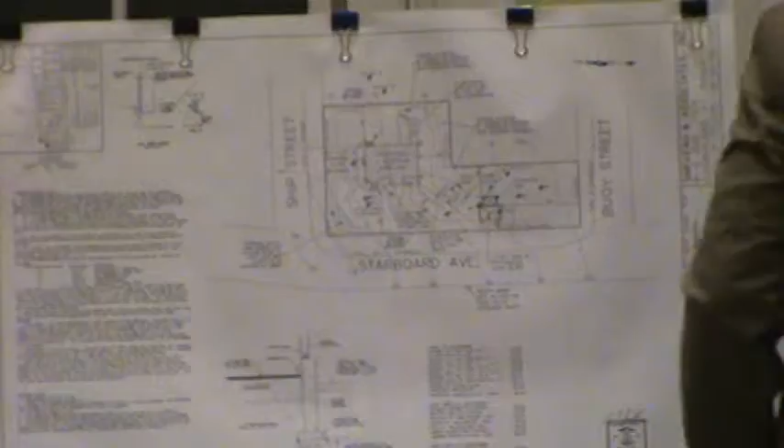We'd like to qualify Mr. Barveau as an expert witness. Now, Mr. Barveau has been here on a number of occasions recently, so we are going to dispense with the qualifications that everybody's agreed. Yes, Michael made a motion to qualify Mr. Barveau. Is there a second? Second. Nancy, second. All in favor? Thank you, Mr. Barveau. Thank you.

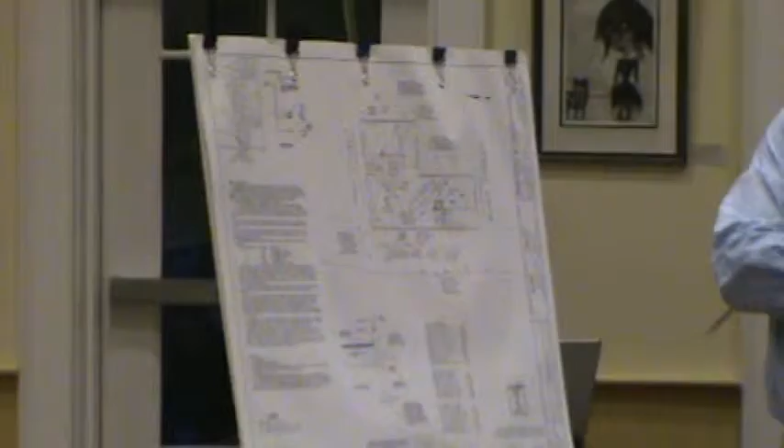All right, Mr. Barveau, can you just describe the current existing conditions on the lot briefly? It's a vacant wooded lot. And what about the grade of it? Well, the property fronts on 3 streets: Ship Street, Starboard, and Buoy. The grade drops from Buoy Street, at an assumed elevation of 100, to an elevation of 90 on Ship Street, which is about a 10-foot drop over about 240 feet of distance. So 5% or so.

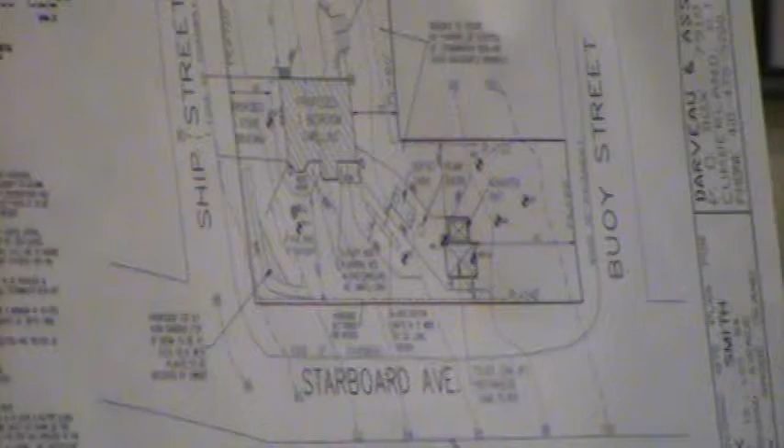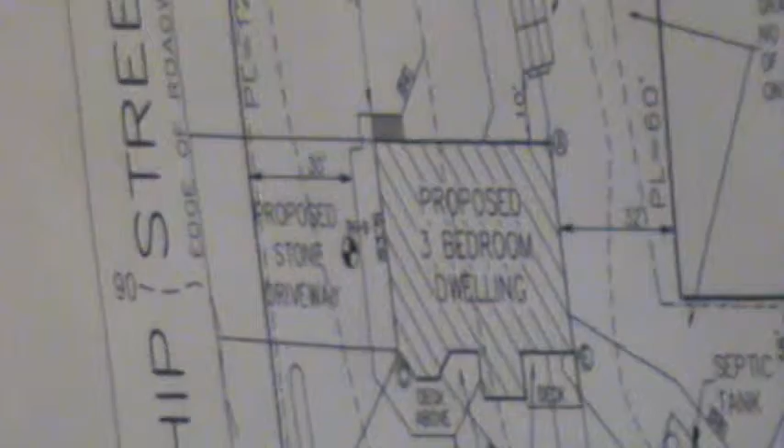And you've got the site plan in front of you. If you can just briefly go over the site plan and proposed improvements. The applicant has proposed a 3-bedroom dwelling on the property as shown on the site plan. The roof area of the dwelling is 1,680 square feet, which is 7.8% of the total lot area, which puts us under the 8% required by the zoning ordinance.

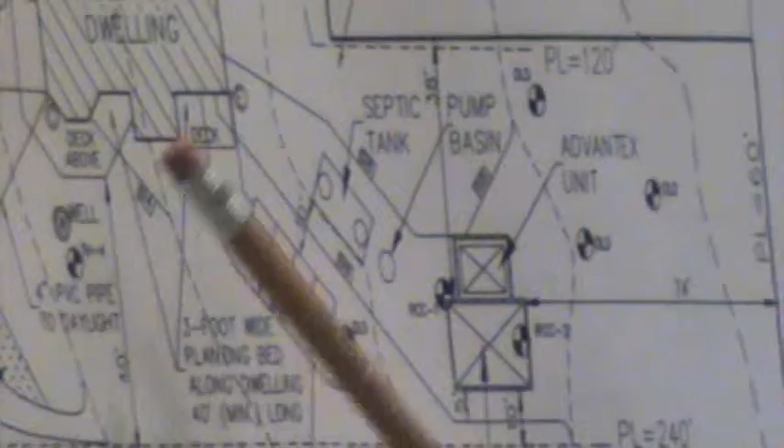The site has a number of water tables that were done on site and adjacent to the site near the property lines. In the area, as I show here, where the septic system is to be located, there were 2 test holes with soil evaluations that determined a 14-inch water table. There were a couple of other test holes, test hole A and test hole B, as shown on the plans, that had water tables from 4 to 6 inches. So there's a high water table in that area.

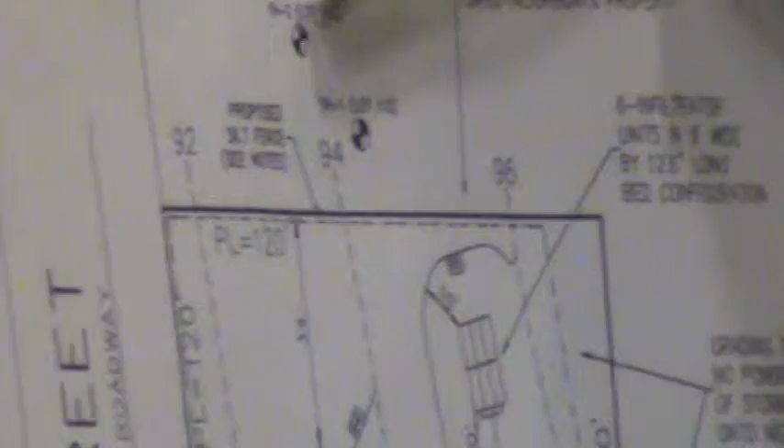There's a couple of test holes that were done immediately adjacent to the property by the neighbor, which had 12-inch water tables. These are at the same elevation, or close to the same elevation, as where we're proposing our drainage system. So we've used that 12-inch water table as an elevation for part of our drainage system.

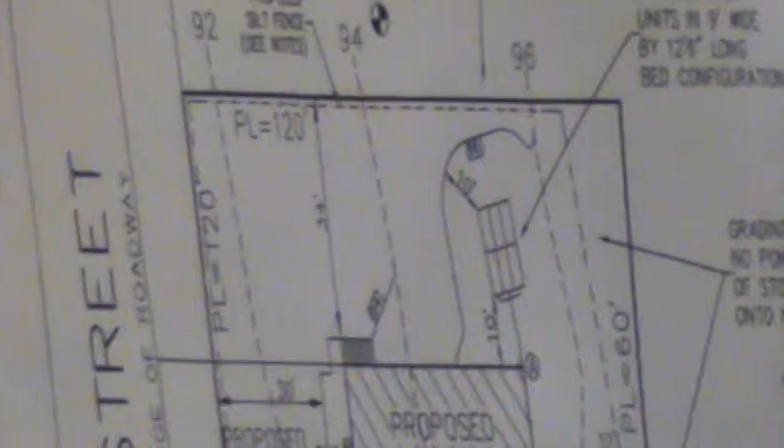The building itself, as I stated, is 1,680 square feet of roof area. There are some decks that will be pervious, not covered, without roofs and so forth, so those weren't included in the calculations. There won't be anything impervious underneath that.

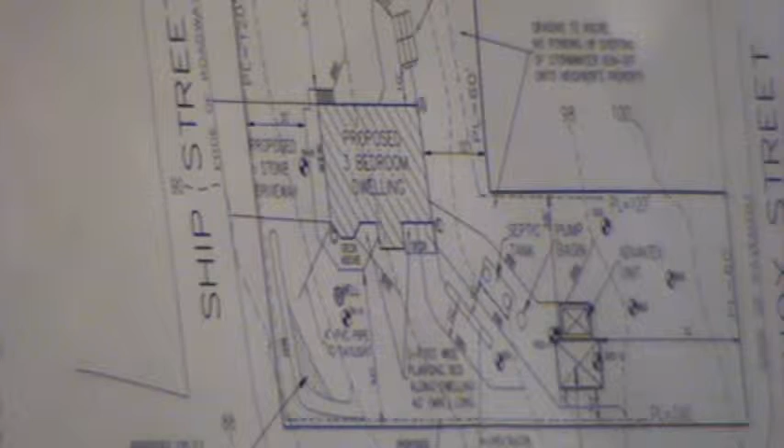There's a few bump outs and jogs and so forth on different parts of the building, and that provides for different areas of a roof to be sloped into different areas that we're going to collect the stormwater runoff into, 5 separate sub-areas, as I call them. In essence, instead of trying to collect everything into one large infiltration system or a large rain garden that in essence would probably be a detention basin, we've broken it up into the 5 areas.

A couple of reasons. Number one, to try to reduce the main impact all in one location, so it's not a concentrated area that will be infiltrated into the ground and will run off someplace else. It also minimized the amount of fill that was needed for the property, so we've minimized how much fill we would need for the site because of the infiltration and stormwater controls.

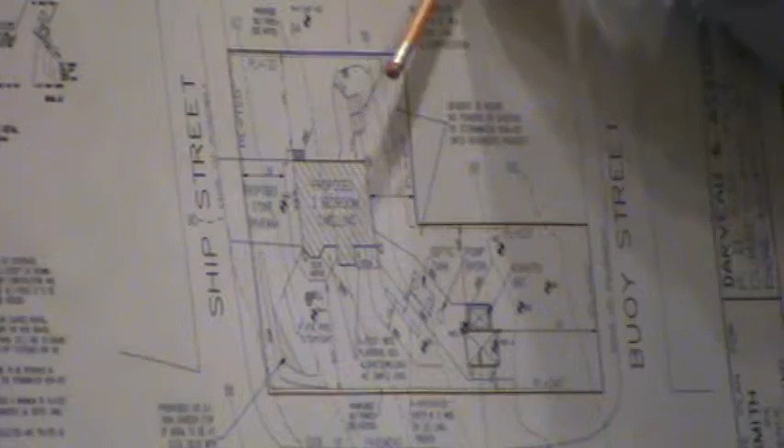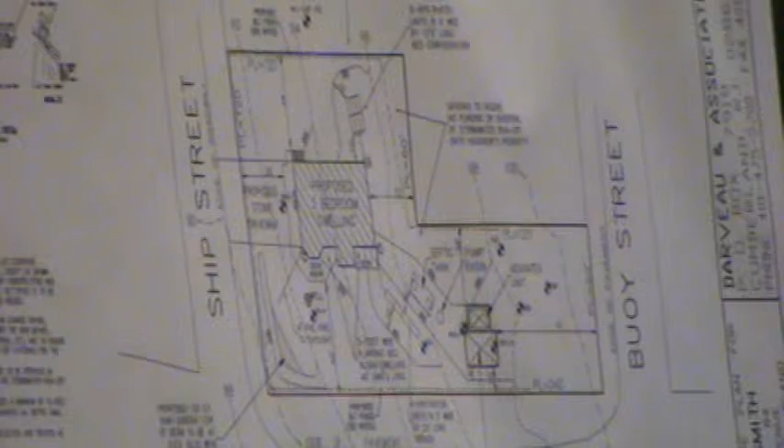So in essence, of the 5 areas that have been proposed, as shown on the site plan, 2 of the areas, A and D, are infiltrator systems in a bed configuration that will infiltrate into the ground. They've been designed according to the town requirements for a 10-year, 24-hour storm event. When we did the drainage calculations, it was based on the infiltration; the void areas within the infiltrator units themselves, whatever those storage capacities are, have been included in the calculations.

Every one of the areas is also over-designed in the sense that if we needed an infiltrator to handle X amount of cubic feet, we always went a little extra. So we always went to the next available number of units for the infiltrator system, as opposed to trying to sneak out and put a little extra stone to make it just work exactly. We just went to the extra one, again, as a little bit of a safety factor.

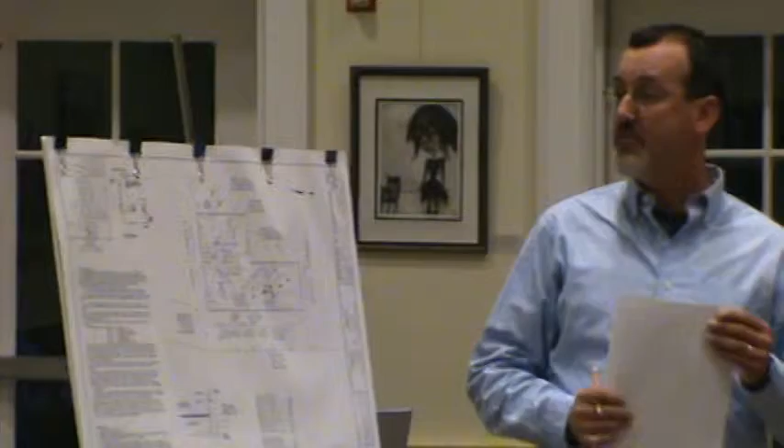So System A will collect the runoff from the rear of the building into 6 infiltrator units in a bed configuration which is 9 feet wide by 11.5 feet long, as shown in the rear of the building. Area B is just a small roof overhang that is 31 square feet. It's just a little bay area from a bump out, and that will go into the void areas of the crushed stone driveway.

The void area of the crushed stone driveway is about twice the capacity that's needed. And a note on that, it's the amount of stone that's 12 inches above the water table. Because that's an area where the water table is about 4 inches to 6 inches, we made sure it's only the stone above the 12 inches, which is your requirement, to be 12 inches above the water table. So that's the void area and stone area that we've used there.

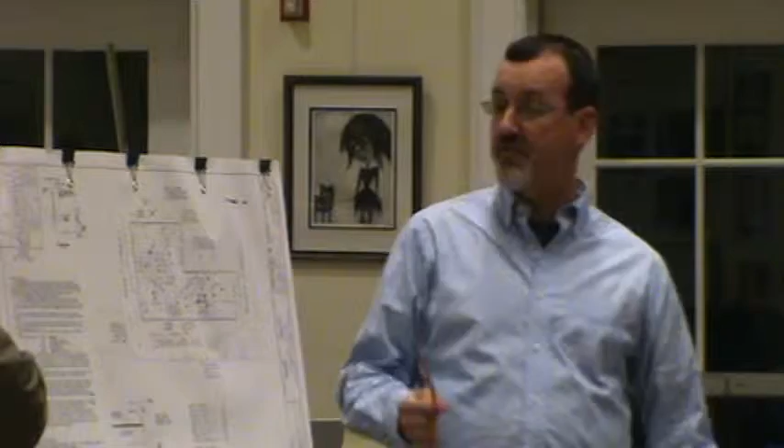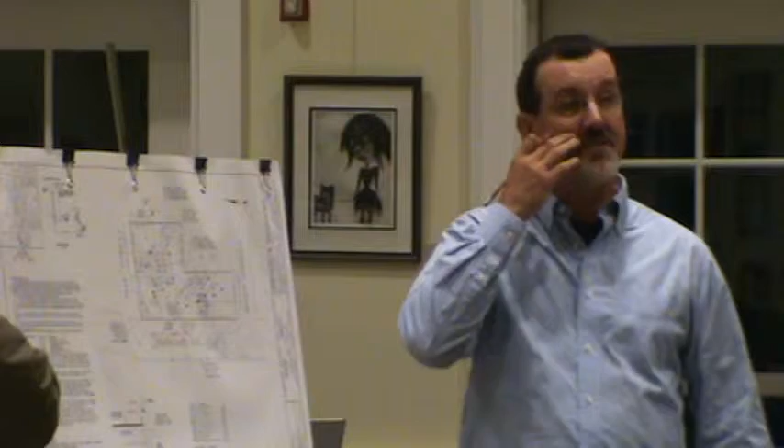Area number 3, or area C, is a small rain garden, which will be at the northwest part of the property, at the intersection of Ship and Starboard. There's a small berm proposed to collect the runoff from that area of the roof, and some plantings, so that it will infiltrate into the ground, into a small rain garden in the corner of the site, so that we didn't have to put a lot of fill in that area for another infiltration system. If we had put in an infiltration system, there would have been more fill, more disturbance, and so forth, so we tried to minimize that area.

The last 2 areas: one of them is a covered entrance over the front door, and there are planting beds underneath some of the decks in the front of the property, and that is just going to sheet flow from the roof into the planting beds and be absorbed and infiltrated for the plants and so forth.